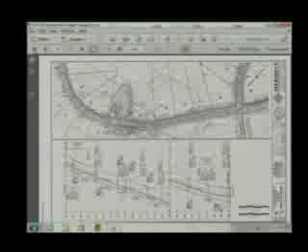Well, your dead-end road limitation is 1,250 feet, right? 1,200. So from that four-way intersection, as you go up those lots, are you saying that you would go something short of 1,200 feet in a phase? It's the goal to be just about 1,200. It may mean we might be a little bit over on one or two of them, but I don't know the exact number. It's the goal to be at that vicinity.

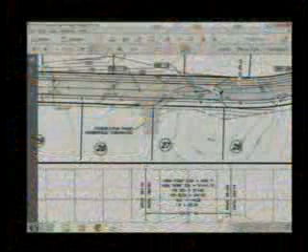We haven't talked about the actual turnaround locations of any phase construction, so it's a good question, good time to bring it up. But I don't know that we hit that dead on, especially since we just reconfigured our four-way intersection - I don't know that I've revised my lineal footage for each one of those. The other one, incidentally, is on lots 27 and 28, same fashion. We're at a point in the road, virtually the high point, where the grading is very minimal to have a temporary turnaround there. Again, it's for road construction - less to do with, and really no configuration or thought for, number of lots.

Tim, how does the phasing affect the bond requirement? Did they bond the whole thing in the beginning, or bond it phases at a time, or what? Having not had to do one of these in Merrimack, I'm not sure exactly how Public Works has handled these in the past. Certainly an answer I can have for the next meeting after I chat with Kyle about it. I don't have an answer for that either at this point.

Mr. Chairman, could one ask - you can't put any of the lots up unless you've got drainage and town water, and surely the drainage has to go down towards Madeline Bennett and that end. Yeah, that's why he's talking about doing that part. Whatever is phase one, those two legs are going to be part of it.

Well, it could be that phase one is, say, the southerly leg, phase two might be the northerly leg, phase three might be to connect them in the loop, and phase four might be the spur that heads out to the west. No - we're looking at the Madeline Bennett connection and the Old Blood Road connection. Those two legs, with no lots on them, are early in the process, obviously, because you've got to get the water and sewer up there, and the drainage, which you just started talking about a minute ago - that's correct.

Got to get that downslope stuff done. But you can't build a lot anywhere unless you've got the drainage set up. Right, that's what he said. Okay, that's fair enough. I just understand that, and utilities.

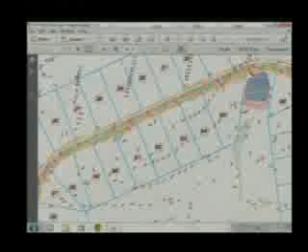So when we develop maybe a schedule of where we think the phasing would most logically be scheduled, we could have numbers that go with those, and it would just make things more clear. In terms of phasing, and I know that I'm probably getting way further down this road than you can answer, but what does the owner applicant envision in terms of the amount of time it takes to fully develop the site?

I certainly don't have that answer right now. The reason that I'm asking that is that with respect to the amount of time that a bond is allowed to exist before it gets called or dealt with affects that. Understood. If you're posting a road construction bond and we're going to hold it for 2 years, but you know in advance that you're not going to get to phase X till the 5th year, then you're definitely going to be bonding it in pieces, as opposed to bonding the whole way through.

And quite frankly, there's likely to be overlap. As one phase is being nearly completed, another phase might already be underway, and so there'll be overlapping bonds. So I think the burden is on us as the applicant to provide you with what the expectations would be. Yeah, it might be an affordable way to approach it too, because as you reduce the bonds in one area, you can just apply it to the next.

Exactly. Yeah, that's all the questions. I'm sorry to torture phasing to death, but that's all the questions I have. No, it was on my list to bring up too.

Does anybody else, just to follow up on the sidewalk item, have any comments to share? I think I have a good pulse of where I need to be or what else I need to follow up on. Nelson, you got your hand up? Okay, I think you've gotten my comments on the Station 34 and that area.

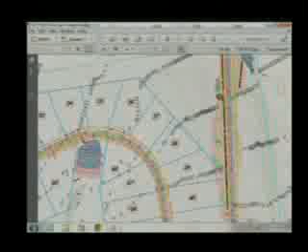I understand the point, but I don't think that's feasible in this particular design, especially given the side slope cuts we have through here. It's going to be prohibitive, and we expect we're going to be into some ledge through this section, so the cut-through might have some rappelling gear associated with it. I don't believe it's feasible.

I think you'd be not ADA compliant when you get over 10% slope on a sidewalk, or 8% slope on a sidewalk. From a trail standpoint, given the set aside for open space and the configuration of what we have, that would require a marked location that someone would be able to have an easement through two adjacent properties through there.

I'm willing to bet that people might think that's a good idea once, and then say that doesn't make any sense, and they'll stay on the pavement and the sidewalk. It depends, the kids will figure it out. Kids will be kids. This is quite a big playground out here once you leave the lots and get into the open space and the adjacent conservation land. It's a big, wide open expanse, there's gonna be plenty of room for the kids to wander about.

Okay, you figure that continues all the way down? I didn't look at the topography. Even off-site, we get into the school property where we have limited rights. We don't necessarily have the further right to create trails on the school property. No, I wasn't suggesting that.

On the applicant's property specifically, those slopes are too steep to begin with, so we're going to have to cut into them to some degree. That's one of the waiver items we will ask for - if there's stable ledge, we might be able to hold a one-to-one slope like we've done in the past, as long as the ledge is solid enough, not friable and loose, which could cause a problem. We asked for that and received that waiver on similar projects, so we'll be asking for that as well.

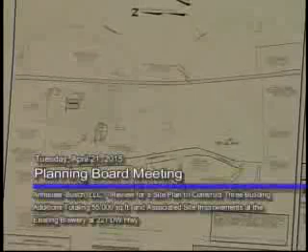There are 202 full-time employees. They operate 24/7 on 3 shifts, roughly 130 in the daytime shift and 35 on each of the other 2 shifts.

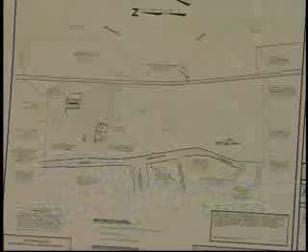Access to the site is provided at the existing 4-way signalized intersection on Daniel Webster Highway. The employee and visitor parking lots, located along the westerly portion of the property nearest Daniel Webster Highway, have about 720 spaces for employees and visitors. There's additional trailer and truck parking located throughout the property. The main body of the site is generally flat and sits about 40 feet lower than Daniel Webster Highway.

Did you say 202 employees in 3 shifts and then 700 parking spaces? Correct, so you've got like 10 to 1 what you actually use for your own employees? Correct - other than the events, obviously, that are there.

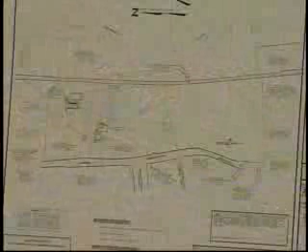The existing site is serviced by municipal sewer and water by Pennachuck. The proposed project - the reason for the project - is that Anheuser-Busch is looking to construct a new can line, a packaging use, which will also result in more brewing and warehouse capacity needed on site. Those are the 3 building additions we're proposing. The 3 building additions will total about 55,000 square feet, roughly a 9% increase to the existing building area. There are 2 additions located in the southwest portion of the site.

A 27,000 square foot packaging addition and a 5,000 square foot brewery addition.

Additionally, there's a 23,000 square foot warehousing addition located in the northeasterly portion of the site. The project is anticipated to add approximately 38 employees and will generate roughly 30 new truck trips per day.

The associated site improvements include new loading docks, reconfiguration of existing parking and sidewalk areas, utility relocation, and stormwater management. The total disturbance is approximately 4.7 acres, or 2% of the entire site, and there are no new disturbed areas. They are all within existing parking lot areas or grass lawn areas.

I'd just like to talk about a few key issues before we open up for questions. We appeared before the Conservation Commission a few weeks ago, and we had a detailed discussion regarding salt and fertilizer use. The two recommendations brought forth by the Conservation Commission are acceptable to Anheuser-Busch. Anheuser-Busch currently has a contract with a local plowing company who is Green Snow Pro certified, and they will also include the fertilizing recommendations into their landscaping contract.

Stormwater is always an important issue, especially since we're so close to the river and within the Aquifer District. Anheuser-Busch currently operates under an EPA multi-sector general permit for industrial activities, including a consistently updated and comprehensive stormwater pollution prevention plan. Industrial wastewater flows to an on-site sewer treatment plant and eventually to the Merrimack Town plant. The existing drainage system on-site drains in a southeasterly fashion to an existing head wall located at the corner of the brewery and then flows to the Merrimack River.

There are many measures in place to prevent discharge in case of leaks or spills on-site, as governed by the EPA permit, including a dry weather pump back system at the head wall outlet. There is also an existing detention and infiltration basin located in the northern portion of the site. It was constructed in 2004 as part of a trailer parking lot addition.

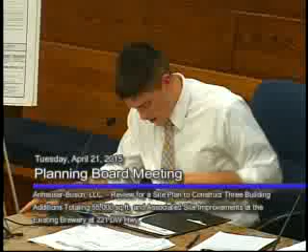The basis for the waiver is as follows. The subject parcel, lot 31, measures approximately 196 acres and contains 4,800 linear feet of frontage along Daniel Webster Highway, nearly a mile. This section of Daniel Webster Highway contains sidewalks, pedestrian crosswalks, and signals along the westerly opposite side, but does not contain any on our frontage.

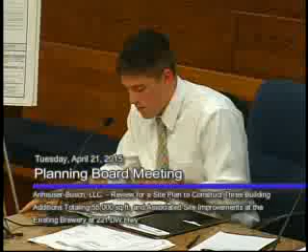The proposed project is minor in nature when compared with the overall property in the existing development. As stated, the proposed brewery expansion will increase the total building area by approximately 55,000 square feet, or 9%. The project will disturb approximately 4.7 acres, or 2% of the property. Fourth point, the existing Anheuser-Busch facility has been in use for 45 plus years without the need for sidewalks along its frontage. The site is unique in that the building and parking areas are significantly set back from the roadway.

Providing a new pedestrian connection from the site to the roadway would prove difficult and expensive due to the topographic conditions. In addition, it is likely that portions of the sidewalk along the roadway would need retaining walls and guardrails due to steep slopes. Fifth point, this section of Daniel Webster Highway, also known as New Hampshire Route 3, is controlled and operated by the New Hampshire Department of Transportation. It is our understanding that New Hampshire DOT would not be in favor of further sidewalk construction along this section of Daniel Webster Highway at this time.

It is our client's opinion that the waiver request meets the spirit and intent of the regulation, as there is ample area on site for employees to walk, and there is existing sidewalk located on the opposite side of Daniel Webster Highway. Furthermore, the requirement to construct sidewalk along its entire frontage would be a hardship because it would mean considerable expense to construct not only the paved sidewalk, but also the associated cost of potential retaining walls, guardrails, pedestrian traffic signals, ramps, crosswalks, etc.